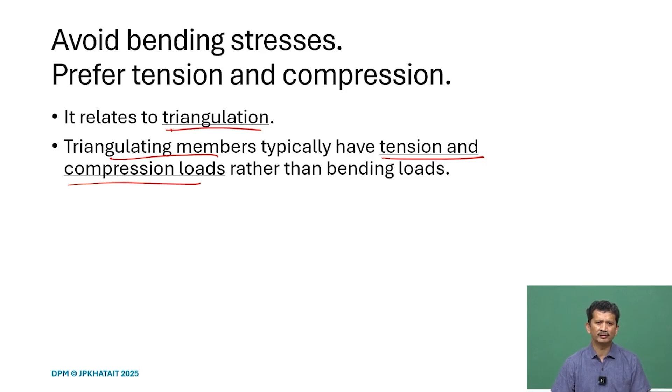So if we follow that, most of the members are in tension and compression, and we try to avoid any kind of bending loads if we are looking for high rigidity and high stiffness. One of the reasons why we look at tension and compression, and why we want to avoid bending loads, we can see from the example.

If we apply any kind of force here on this structure - it is a cantilever beam - what will happen if we look at the stress distribution in the beam? This is the kind of distribution we usually see, under these conditions.

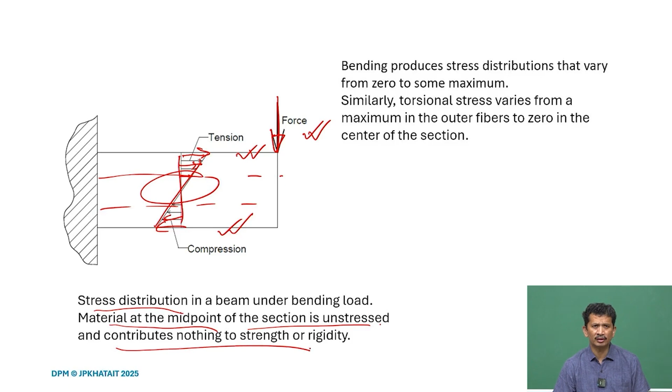It is linear - the topmost layer will be in tension and the bottom layer will be in compression. If we see the middle sections, they are not taking much load, or in a way we can say they do not contribute much. So in terms of material usage, it is not very optimized. That is why we say the material at the midpoint of the section is unstressed and contributes nothing to the strength or rigidity. This is the bending stress distribution.

A similar thing happens in case of torsional loads also. When we apply any kind of torsional load, the torsional stress varies from maximum on the outer fibers to zero in the center of the section. So in terms of material utilization, bending or torsion is not very good.

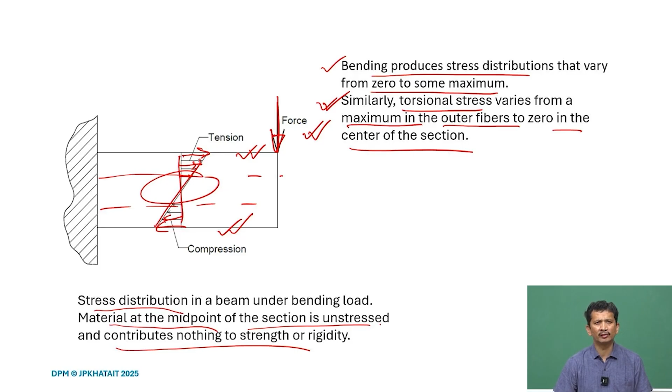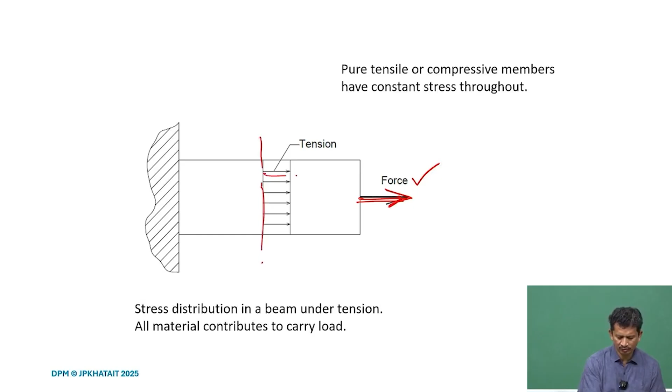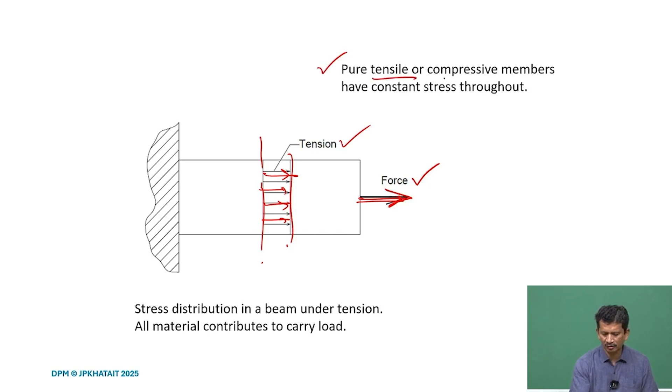On the other hand, if the member is in tension or compression - if this is the case and there is a longitudinal force applied - this is the stress distribution here. It will be tensile in nature in this case; if it is compressive, yes, it will be a compressive load. So in both cases, tension or compression, there will be constant stress throughout the section.

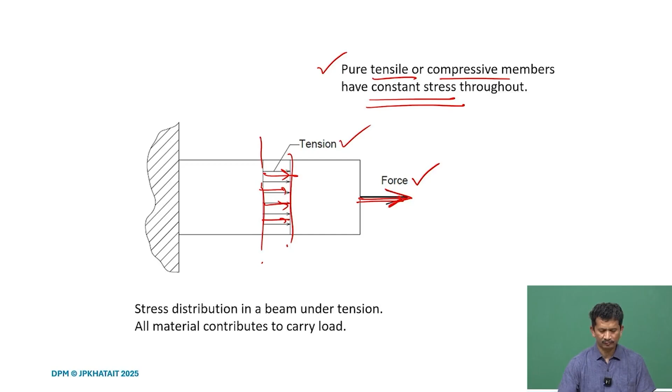In terms of material usage, every section is participating and taking the load - it is shared by each and every section of the component. So one design principle, if we are looking for high stiffness and rigidity, is to get uniform stress and try to design for that.

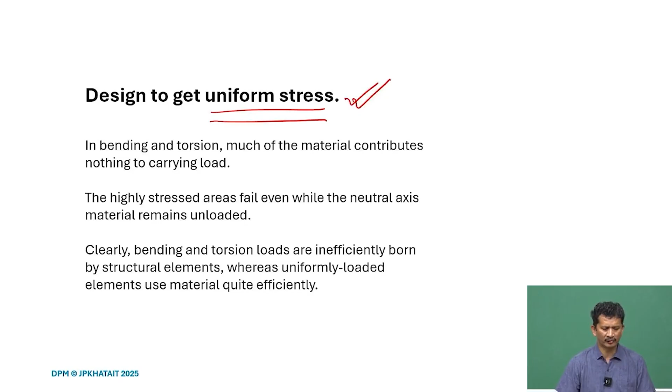What we realize in bending and torsion is that much of the material contributes nothing to carrying the load - only the outermost layer, top or bottom, is significant, and therefore we try to focus on that.

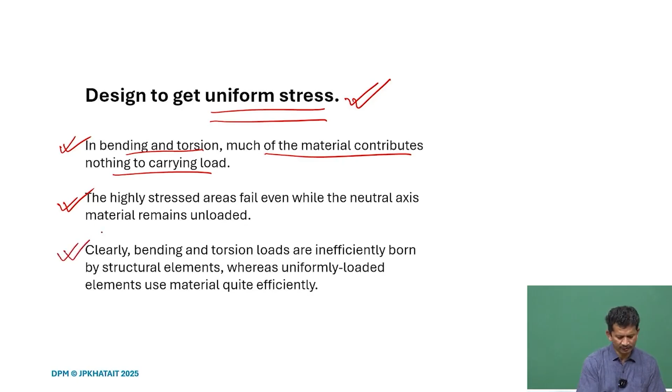We also find that even though the inside material is not stressed, since the outer layer is highly stressed, it can go under failure because the stresses are highest there. For that reason, bending and torsional loads are inefficiently borne by structural elements, whereas tensile members are uniformly loaded and take the load quite efficiently.

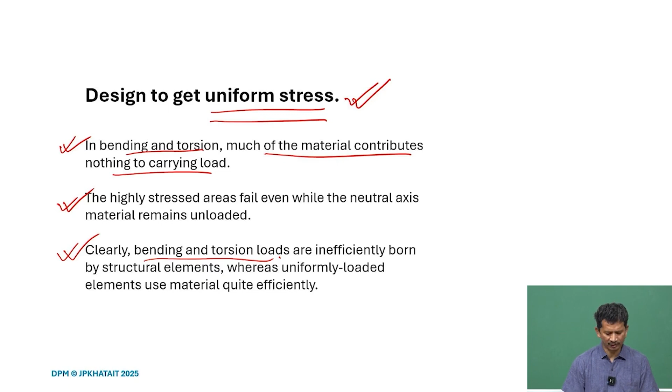Here is an illustration, and I think in most civil applications what we talk about is I-beams. If we try to relate the design principle, we will be able to understand why I-beams are used more often.

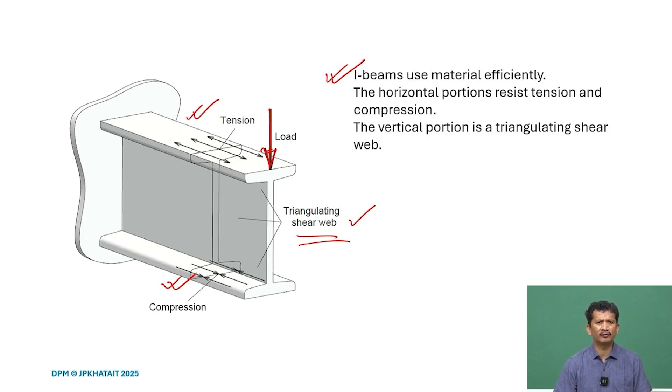Because of the bending load, the top and bottom layers are taking the maximum load, either in tension or compression. So the material is more on the upper and bottom layers, and the middle section only provides the triangulating structure - a triangulating shear web. Therefore, in many structural designs, we see I-beams used more often when loaded under bending.

Similarly, if it is for torsion, this is the shear stress distribution we see. It is maximum here on the outer edge and zero at the center. So we realize that only the outer section is more important, and we can remove the inner section to get rid of material, making full use of what we have. So most of the time we prefer to use hollow tubes if there is a torsional load.

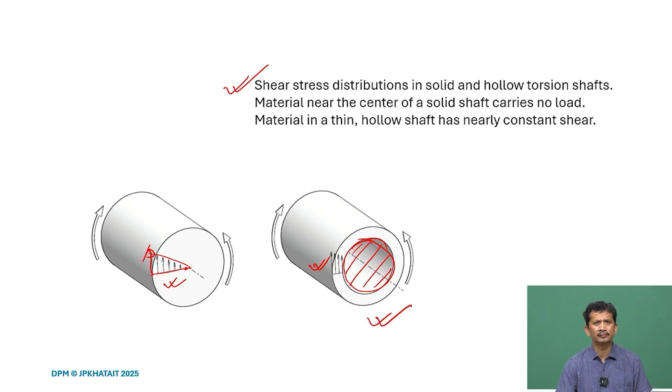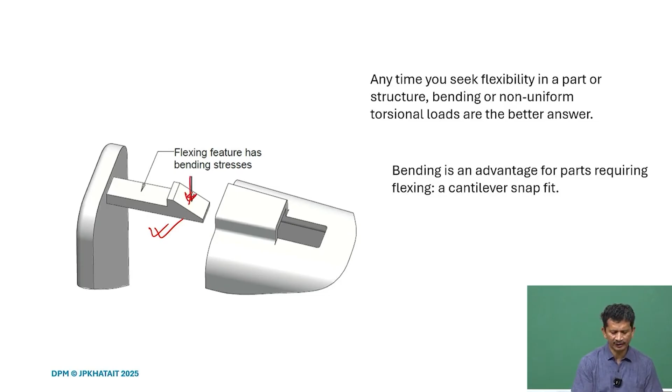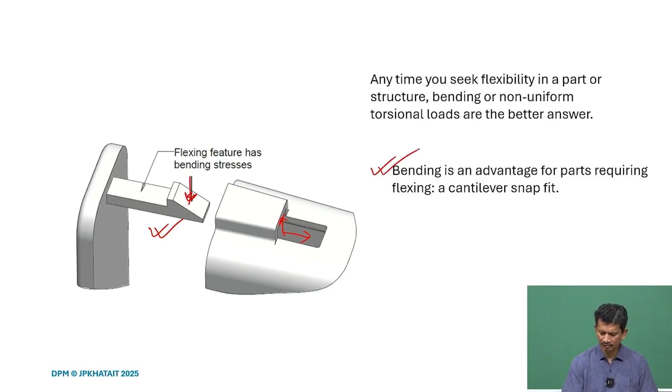So wherever we need some flexibility or compliance, we go for bending or torsion. For instance, in this snap fit design, we want that under loading this should deflect and get locked here. It comes in the wedge, and when we try to insert it, it should flex. We can insert it easily, and then it springs back and provides locking. So bending is an advantage for parts which require flexing, as in this snap fit we are designing. Similarly, we can also say for torsion.

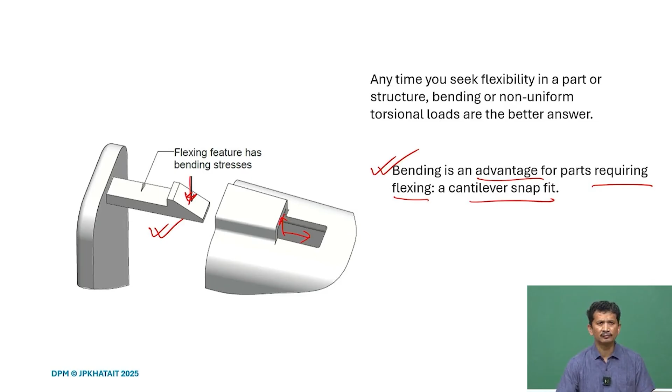The next design rule or principle is to improve designs with self-help, which I earlier referred to as mechanical intelligence. We can do a lot of things at the design stage, at the conceptual stage, which will help. The requirement is such that the requirement itself reinforces the performance. How?

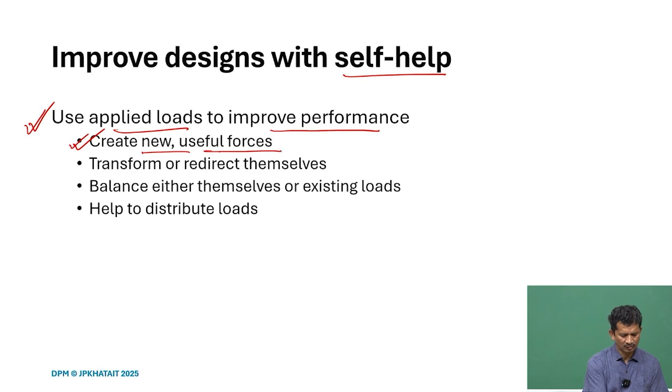When we say self help, we mean using the applied load itself to improve the performance. How? By creating new and useful forces, or transforming or redirecting them. It can also balance existing loads or help distribute the load. So we try to find a mechanism so that this can be achieved.

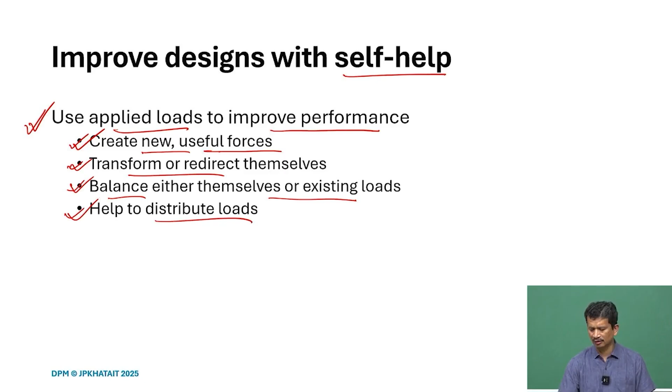For self help that creates forces, we have a good example: pressure cookers, found in almost every home. The pressure-formed seals, O-rings or internally mounted doors, use self help to create robust sealing. If pressure builds, the design is such that these O-rings or seals provide more sealing, giving robust performance. This principle can be used to design pressure vessels, fermentation tanks, autoclave systems, or any pressurized system.

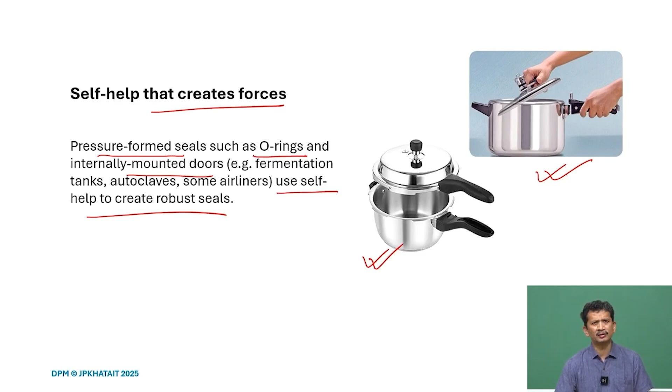This next example is just for a game, but the concept can also be used elsewhere. It's a trap, a very simple toy made this way. When we insert our fingers from both sides, the diameter increases, so you can insert your fingers very easily. But when you try to pull your fingers out, it contracts, and because of friction the two ends stick. As you pull, the diameter decreases and it grips the fingers further, so it becomes very difficult to take them out. The harder you pull, the tighter it grips. This is the kind of self help we are talking about, and such mechanisms can be implemented in a lot of designs.

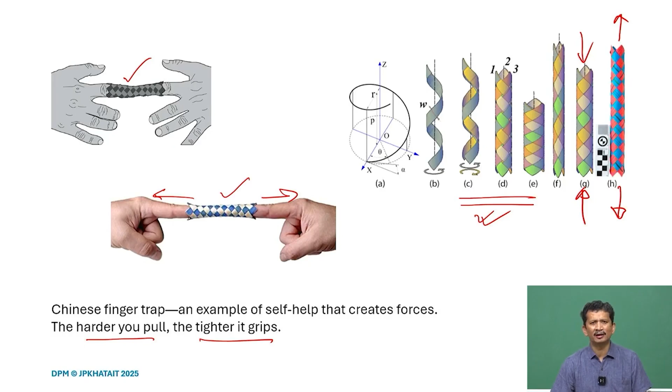Another approach is to redirect the forces. For instance, in the design of scissors, there are different designs for right hand and left hand use, and the way it is designed, as you move, the blades are brought together to get a nice cutting effect. So the scissor's shearing action is improved by the hand movement.

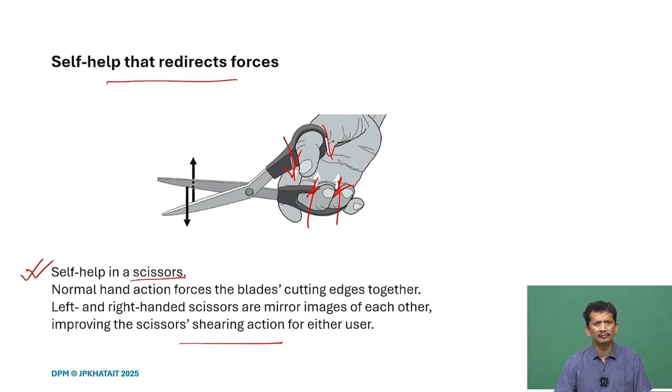We can also use self help to balance forces, with the idea being to balance, neutralize, or minimize undesirable effects. How? One way is to use counterweights, which are used in many bridge designs or elevator designs. This increases the weight, yes, but it also eliminates moment in the structure, which helps in the design and brings some symmetricity that aids performance.

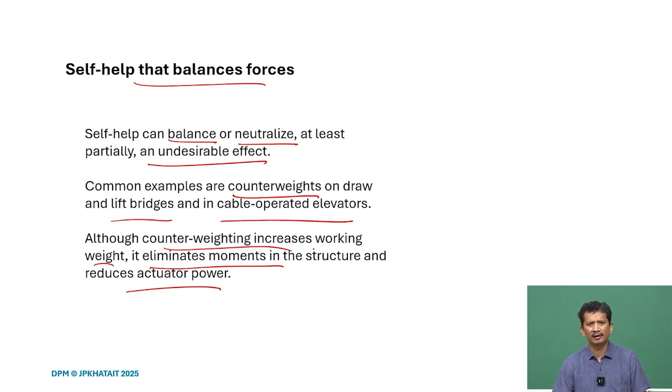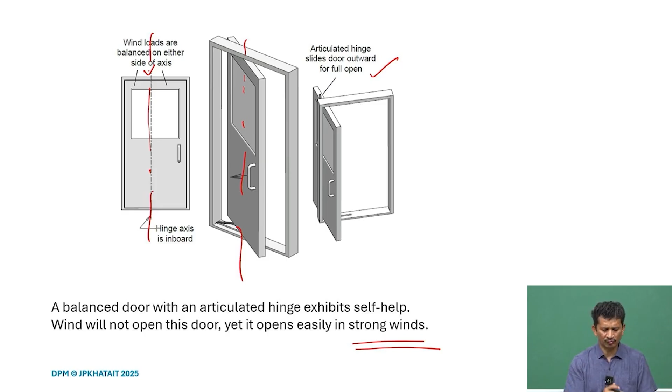it will counteract and it's easy to open and move it aside. So this is also a very good example of self-help.

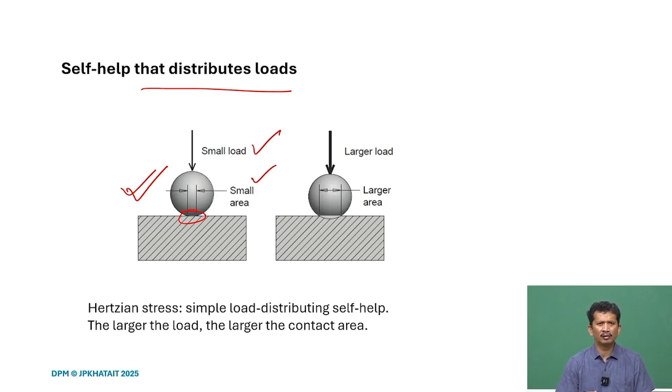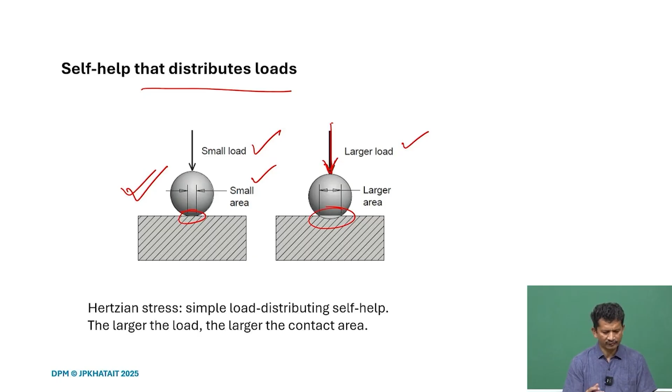Another commonly used example, which many times we may not realize, is a ball joint kind of thing. If there is a small load, the area of contact deforms, and the area of contact will be small and the load will get distributed. The moment we have larger loads, this area increases, and that is how it supports the bigger load and helps in counteracting the load.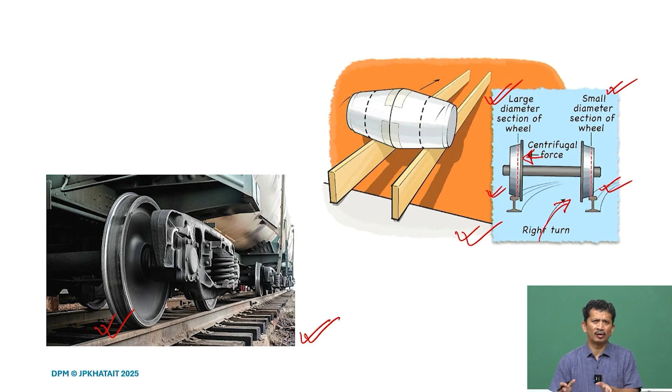There will be centrifugal force here, and because of that it slides. So what you find is that on the left it is larger diameter, on the right you have the smaller diameter, and that change in the radius or diameter will make it steer to the right. Similarly, if it is a left turn, it will slide to the right, and then you have a smaller and larger radius on the outer side, and it can turn to the left. So, very good example of self-help here.

I think very good designs like governors. If the speed is very high, because of the centrifugal action, it will be thrown out and it will collapse, and then it will try to balance, also controlling the fuel intake and all those things. So the governors in old machines, diesel engines, are a very nice design.

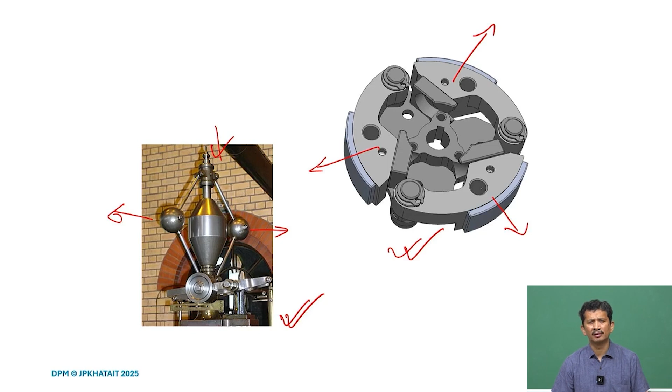At the same time, you can also think of centrifugal clutches, overrunning clutches - as it spins, all these things will just spread because of the centrifugal force, and they will come in contact with the outer drum and provide the braking action, so that this speed can be reduced. As the speed reduces, it is loaded with the spring, so it comes back. So these are very good designs, and we can use these in our products or machines to control the speed. So again, it is a very good example of self-help.

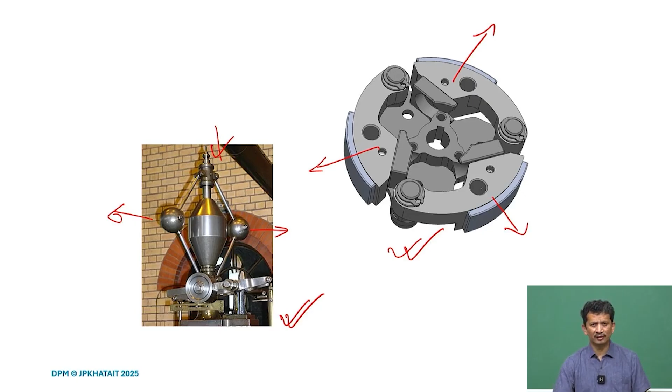There are many such examples as we go across, and we will discuss some of these designs in detail, and there are a lot of compliant versions.

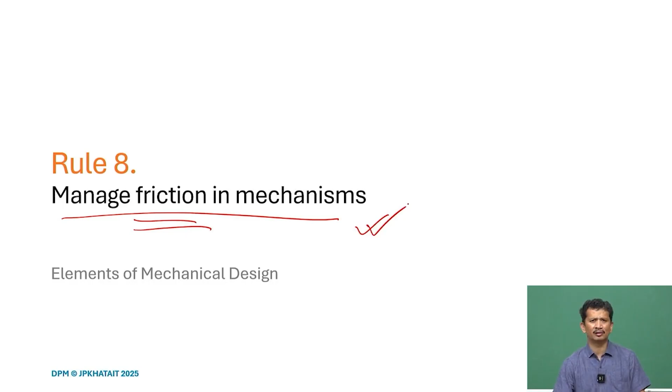The next design principle or rule is to manage friction in mechanisms. Whenever we talk about precision machines or high repeatability, invariably we will be talking about friction and how to manage it in mechanisms. This is a very important topic when we are talking about precision machines. And the reason is, by nature, the way two surfaces come in contact and friction is defined, that creates a lot of problems and uncertainties, which gives rise to a lot of issues. Therefore, we try to avoid any kind of sliding friction, sliding contact.

If there is any sliding contact, we try to maximize the length between the linearly guided components. For instance, if we have a drawer and those kind of things, we might have seen that. If we have to choose between rotary or linear, we always go for rotary motion. If we have to use any kind of bearing, always go for rolling element bearings rather than sliding ones, and if possible, try to use flexures to eliminate friction.

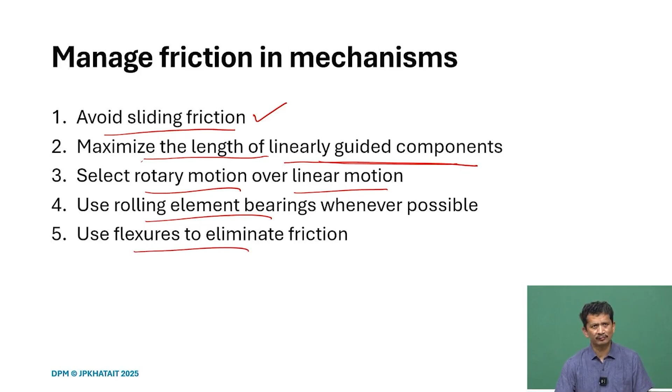So why are we talking about friction? Why do you want to avoid sliding friction in the first place? Because managing it is very difficult. And what does that mean?

Near zero speed is a stick slip behavior. The two components try to stick, and as we try to move, they suddenly move. This stick slip behavior is predominantly there because of different values for the coefficient of friction, so when it's static versus when it's moving. The difference between the static and the dynamic coefficient of friction gives rise to these kind of behaviors. And the moment we encounter stick slip behavior, it's very difficult to achieve any kind of precision.

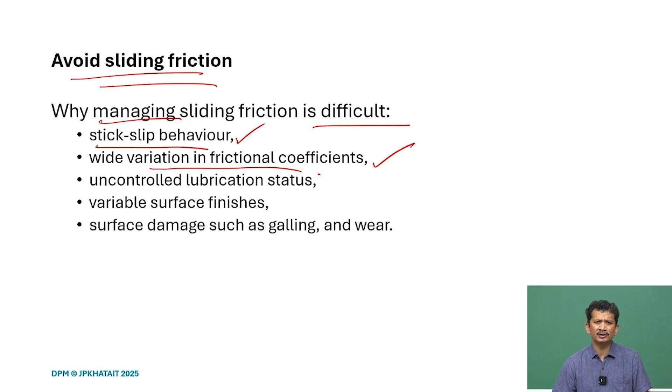Another thing is the frictional coefficients. It's not a fixed value, right? Many times in the books, in the handbooks, we refer to some numbers, but there is no one value to use. In our calculation we can always use a number, but there is a wide variation, and it can vary on any given day depending on the temperature, on the loading conditions. There are various parameters, so it is very difficult to control.

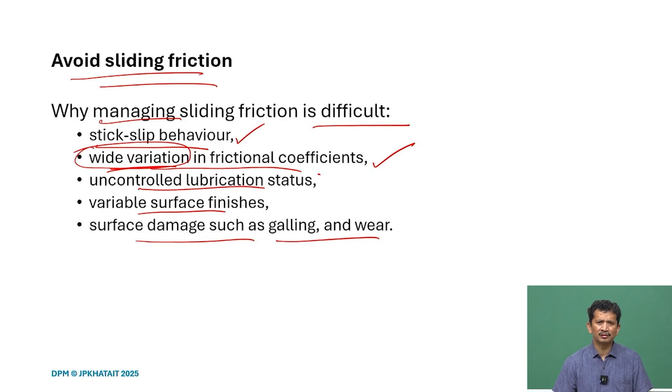It varies depending on the lubrication status of the surfaces, surface finish, and it leads to a lot of surface damages like galling or wear. Since it is a statistical parameter, we're talking about the entire surface, about the lubrication status over the surface. But the contact might be at certain locations only, and if you do not know, then we have to deal with this wide variation. It means it is highly unpredictable, so therefore it is very important to avoid if possible.

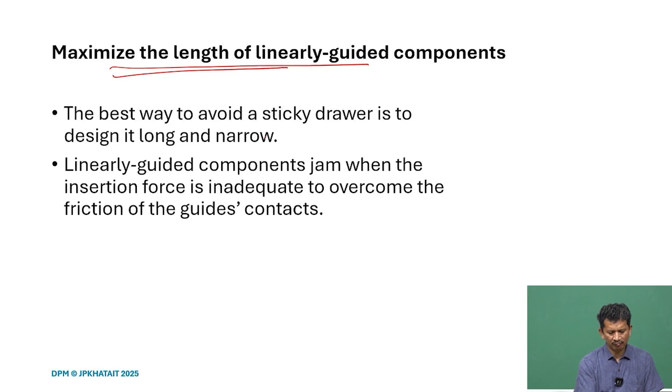So again, we are talking about maximizing the length of linearly guided components, and we will also talk about those things later in the course, but it is a rule of thumb generally. We try to maximize the length basically to avoid this kind of behavior, like a sticky drawer. If it is small, then very likely it will get stuck, so we have to push and pull very gently, try to adjust and then do that.

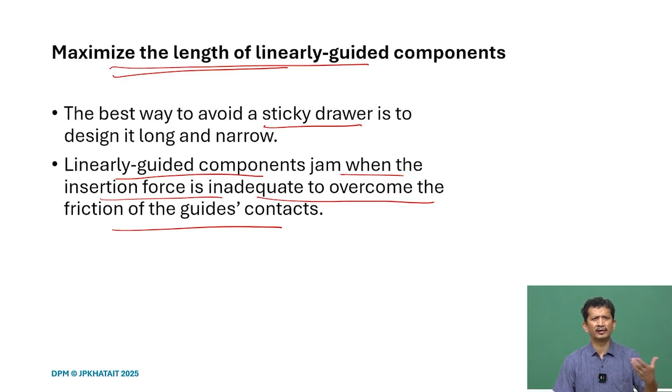Linearly guided components jam when insertion force is inadequate to overcome the friction of the guides' contacts. So if it is getting jammed, the edges will get stuck, and no matter how high the force, the friction force will also increase, and these kind of drawers will get jammed or the components will get jammed. That is why whenever we try to assemble, suppose bearings, it's very important to use proper tools. Otherwise it's very difficult to take out the bearings or even assemble them, or they can easily damage the surfaces.

So this is one example. If you look at it, yes, it's highly exaggerated, but it comes in contact at these places and there will be friction. And if the load is not symmetric, if it's off, it will create undue forces and then it will get jammed.

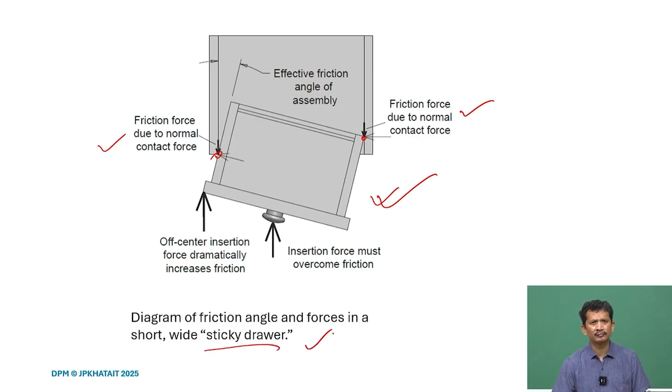So some illustrations. If we take these kind of examples, what we realize is these are very good examples here. Many of the designs in automation systems or in robotics we frequently use. So we have a carriage and then we have linear bearings here, and we provide the two guides. What is the challenge here? What are the issues?

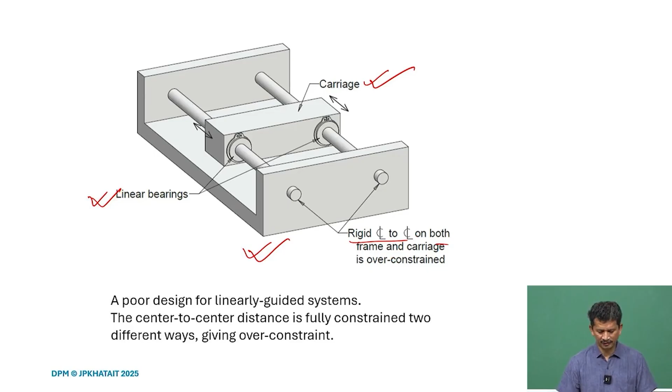What is the center line saying? What we realize here is the two center lines for the guides - how to get them aligned properly, how to get them parallel, because it's supported here, and here there are 4 holes. How exactly can they be located, right? The distances between the two, also the distance between the two linear bearings on the carriage. There are so many over-constraints here.

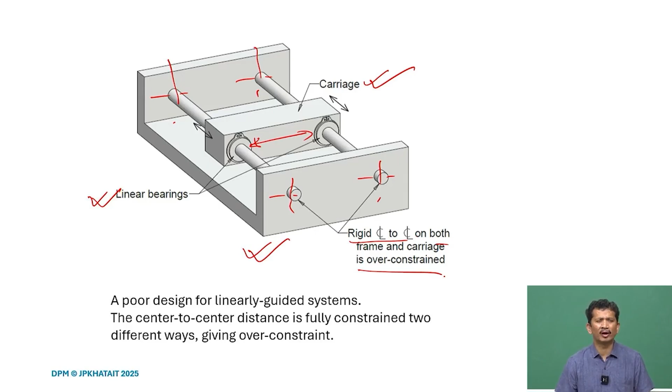The only way to address this is, yes, we can define very high tolerances, so the cost will increase. At the same time, if we do not want to do that, then we have to compromise on the design, so we provide a lot of clearances - a lot of backlash and movement there. So it is a very poorly designed system, and one of the reasons is the over-constraint here, how to put the two guides together and make them parallel.

If we design this way, we will face a lot of problems, and there is always a limit. Of course, if we want to address the issue, we may find a way to address this over-constraint, and release certain degrees of freedom. Then if it is exactly constrained, we may find that it is very easy to achieve certain repeatability. So it might be off, but it is repeatable, and we can always offset using a proper controller, or even adjustment, to address that kind of issue.

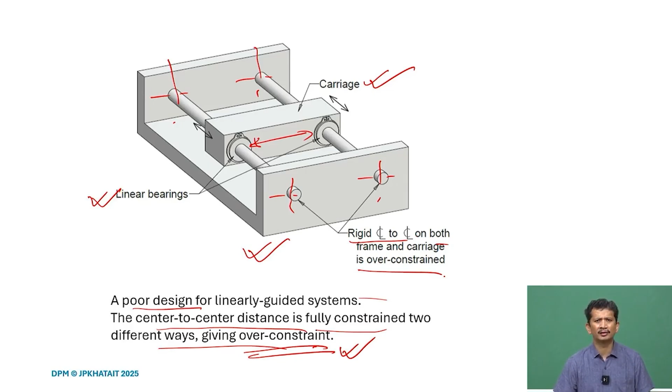So next is why rotary motion over linear motion. With linear motion, we understand that there are a lot of jamming issues, the over-constraint we have. If it is rotary motion, a lot of those problems can be eliminated, but we also realize that the loading itself provides some moment, and it always tries to bring it down. So of course in this case also there will be some uncertainty, but it is always within certain limits, and that we can address.

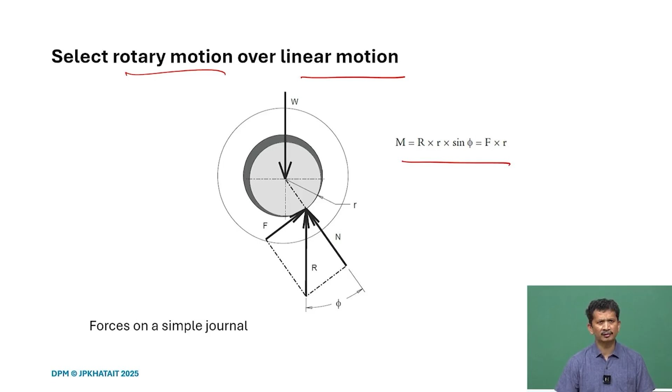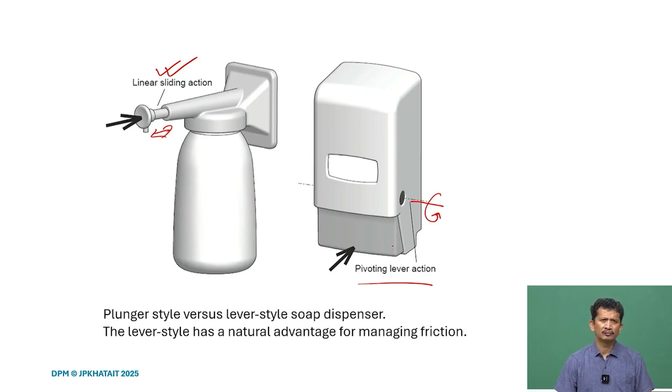They always have a problem because there is a gap, and it tries to stick and slip. So many times it gets jammed. But if it is rotary, you apply the force, so there will always be a moment and it tries to rotate, and it's very easy to use. So wherever possible, try to eliminate any kind of sliding action with rotating action.

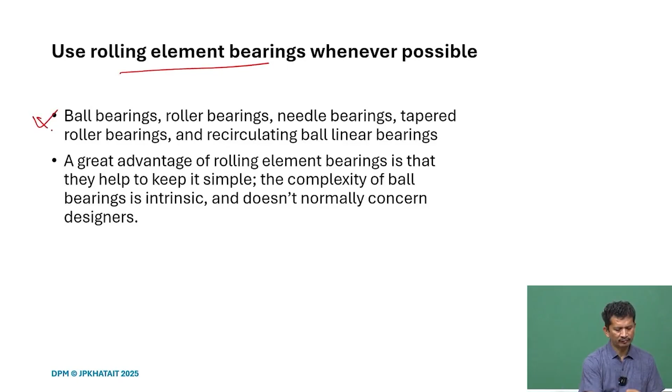There are many kinds of rolling element bearings: ball bearings, roller bearings, needle bearings, taper bearings, recirculating ball bearings. If we talk about ball screws or even linear guides these days, they have recirculating ball bearings, ball linear bearings, and although it looks like sliding, inside there are rolling elements. We still get rolling element bearings there, and we can avoid problems related to jamming, which we generally encounter with a sliding pair.

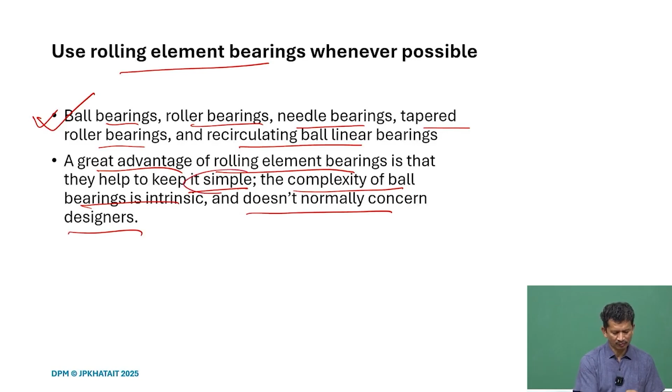One reason you want to use rolling element bearings is that it's so simple to use. But if we open any bearing, it's highly complex—it's hidden, it's intrinsic, and we don't have to worry about it. A designer usually doesn't have to worry about how the bearings are made or designed. You look for the standards, the loading, the life you want to have, and you follow the design methodology and selection method. So, how bearings are made is normally not a designer's concern. It's simple to use, and the complexity is intrinsic.

One way to address friction-related problems is to just eliminate it. Many times it's not possible, but wherever possible, can we do that? What we realize is that in today's machines or products, the range of motion is often very limited. If that is the case, we can always remove conventional joints using rolling element bearings and replace them with flexure elements.

This is one topic we will cover in detail in this course: different kinds of flexures and compliant mechanisms. The idea is basically to eliminate friction-related issues so that we can get rid of the white noise, the randomness in the design, and that way achieve high repeatability.

Even if the range of motion is very large, we can always go for coarse movement and finer movement. For the coarse section we can use conventional design and conventional bearings, but as we move to flexure mechanisms or compliant mechanisms, we try to achieve better repeatability.

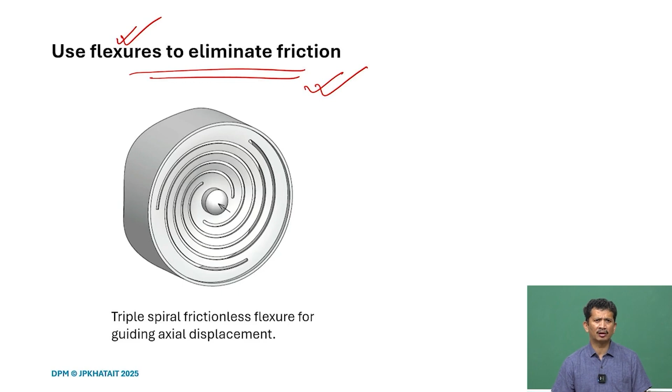We also realize that flexures are basically members in bending or torsion, so here we are looking for low stiffness and very large compliance—therefore we do the opposite of what we'd do for stiffness. For stiffness, we go for tensile or compressive load, so we design most members in compression or tension, but wherever we're looking for compliance, we go for torsional and bending loads.

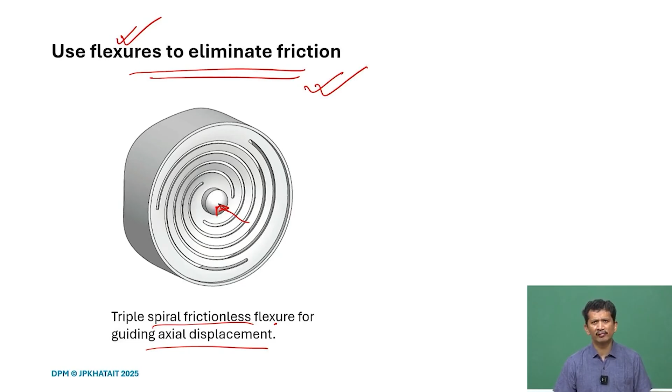This is one example where we can guide a member axially, but it can move back and forth, and it can easily move a few millimeters without any problem. Since it's an elastic mechanism, it always comes back to the same location—even if it's non-linear, it's highly repeatable. So predictability and precision can be ensured, and we can think of achieving precision at the micron or even nano level.

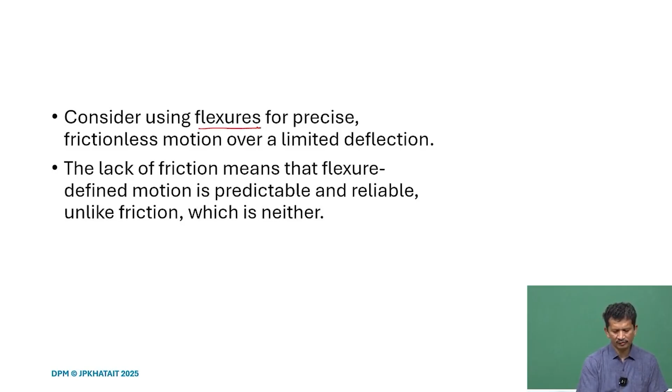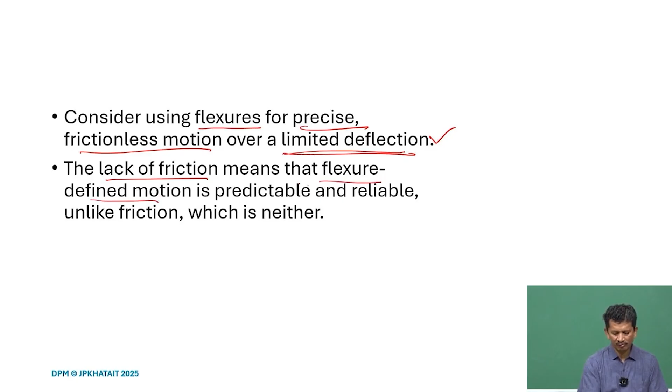As I mentioned, consider using flexures for precise frictionless motion over limited deflections. It's for a smaller range of motions. We eliminated friction, so lack of friction means predictable and reliable. Both are ensured when you are using flexure members, which is not applicable if there is friction.

So it's very important that we focus on these kinds of elements. If you look at machines designed for very high precision or very accurate systems, whether it's pointing devices, instruments measuring at that scale, microscopes used for material characterization, or any kind of machines for the semiconductor industry...

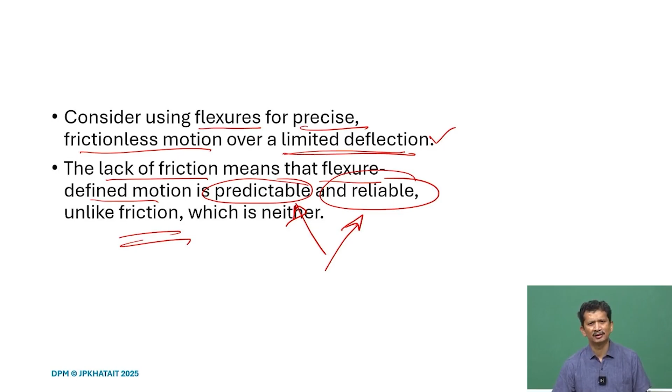You will find many of these mechanisms embedded in those machines. After this course, I am sure we will be confident and able to explain why those things are there and their importance. Most likely we can also develop and build those machines, achieve those precision levels, and ultimately using proper control and vibration isolation techniques, achieve accuracy in the order of nanometers, or atomic orders.

So today we try to close it, and what we learned are the elementary rules, or what we can say, design principles in general.

What I also try to emphasize is that these things are not something new. It's well known to people in the industry. If you are involved in designing products, most experienced designers and machine builders are aware of these issues. They apply these rules knowingly or unknowingly because it is developed and they understand that it works.

So as a fresh engineer or student, one should know and start practicing these things. We realize that if we just follow these simple rules, it's very easy to design systems at low cost with very high performance, repeatable performance. There are still a few things we will talk about which may be required if we are going to design systems for very high precision, ultra precision movements.

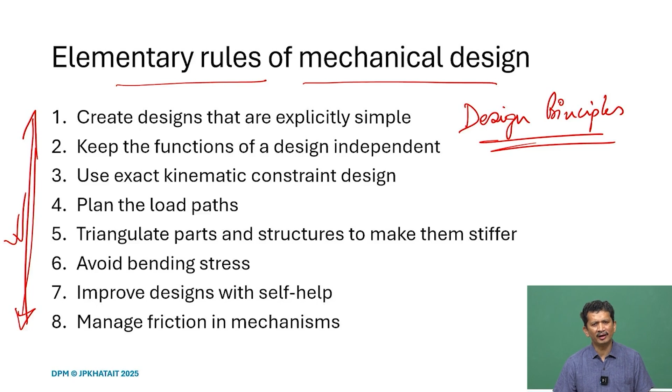Yes, there are many things we will learn only while doing it. Unless we take that step and that leap of faith, we may not be able to achieve things, and then we will be only dependent on others, only buying and importing machines and products from abroad. But if you want to be self-reliant and successfully achieve the Make in India concept, keep these things in mind, and let's start designing things for the future, for high-end applications, for our own good.

We will cover most of the content from these books and discuss them during the course. As we move on, if you face any problem or have questions, please write to me or send comments. We will take up those questions and try to address some of them, and try to learn more. Okay, thank you.